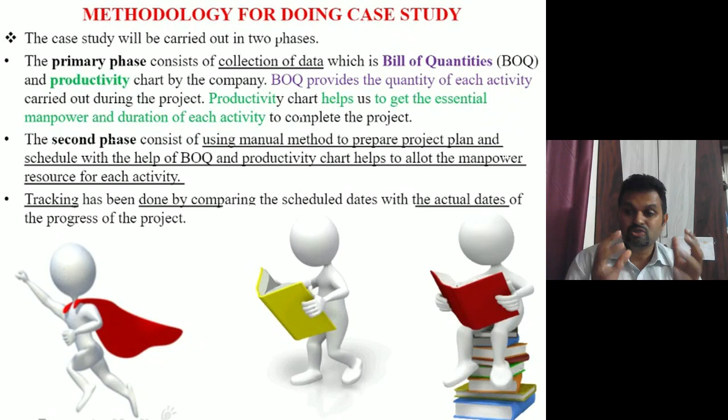We have extracted the scope of the work for this particular project. What I did, from the planning department of the project, I have taken the bill of quantity. So from the bill of quantity, I can take out what is the scope of work.

Next, the company has around 4 to 5 previous projects done in the same city, so they have a basic productivity chart. We are going to refer to the same productivity chart for our references for doing the planning. So we have taken the scope of work from their BOQ, and we have taken their productivity chart from their company's basic labor productivity chart. From there only we have taken the element.

In fact, now this is very very important, right? What is the issue we are having? Let's try to understand it. What is the concern or what is the issue we are having? What happened, I will tell you. When we are doing any kind of project planning...

When we are doing a project planning at an initial stage, we are not having all the details of the working drawing. We are not having all the working drawing details, right? But definitely we have some of the typical plans, working drawing, layout details maybe we are having. So on the basis of that, approximately I can calculate the quantity.

For example, if there is an 8 floor building and they have given me the layout plan, I know what the slab thickness will be, which is typical. I know in the layout where they have put the column, so I know how much the column is going to remain the same till the 8th floor. So I can calculate how much the quantity is, and I'm able to calculate all other quantities.

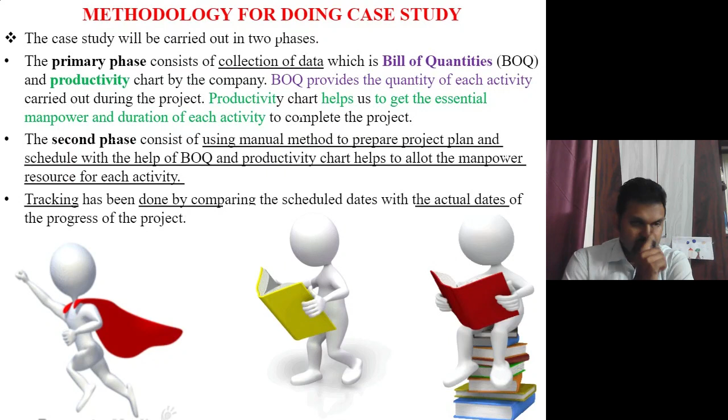My audio is not there. Are others able to hear my voice? Okay, audio is good. Javed, just do a refresh, I think there may be a small fluctuation. Okay, fine, thank you everyone.

Now, the issue which we face in the site planning is that all of the materials I can find out from the layout drawings or all the typical drawings. I can find it out, right? But the issue is facing in the steel quantity.

Sir, you may ask, what is the reason, what is the difficulty you are facing in the steel quantity? It is simple, sir. The reason is that even if they have given me the section or the reinforcement details in my plan section, for calculating the steel quantity, I need to go through the BBS, bar bending schedule. And for doing that bar bending schedule, I should be having all the reinforcement details of my structure, but which I'm not having right now at the initial stage. So that is one of the difficult phases we are having.

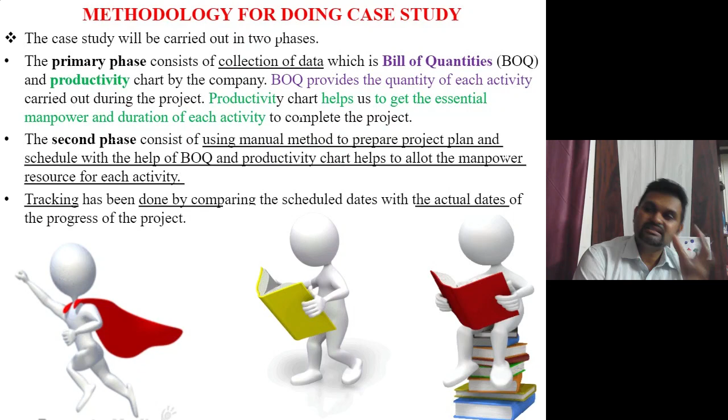So let's first learn how to do the steel quantity planning, which we are going to learn first in the preliminary stage. So what I did is I have taken a scope of work from the site directly, and put different elements around it.

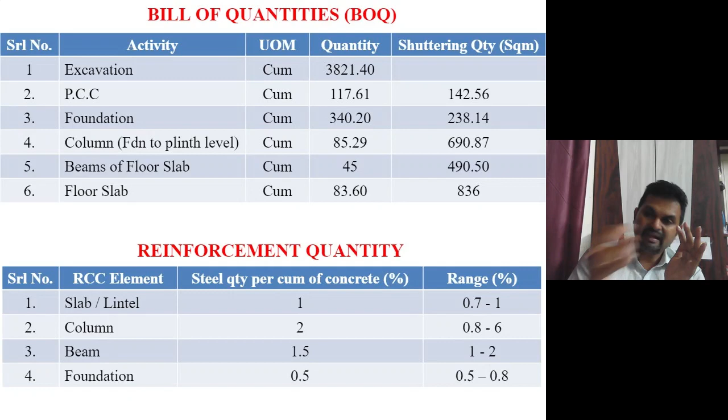When I solve some numerical problems, everyone should get the same answer. That's why I'm putting this third column, where I'm considering 2%. But it depends on your site condition.

You can take 0.8 if it's G plus 1 or G plus 2. If the structure is high, you can go for 3%, 4% — that depends. Next is the beam.

For the beam you can take anything between 1 to 2%, so right now I'm going to take 1.5%. For foundation, you can take somewhere around 0.5 to 0.8%, so here I'm considering 0.5%.

Now I have a question here, a very interesting question. Just a moment. What I'm experiencing here is... this is a very interesting observation, I'm telling you.

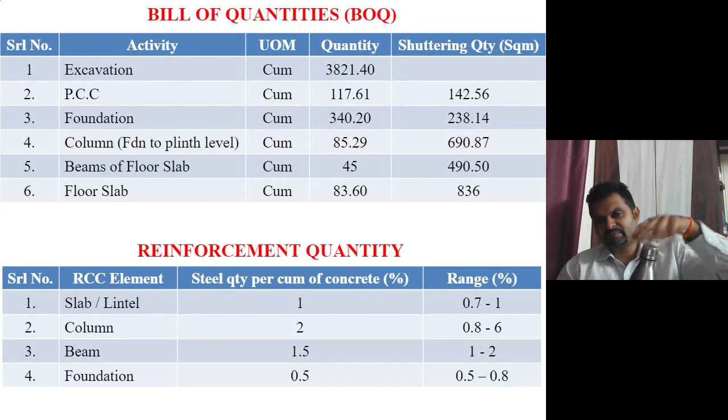Okay, okay, good enough, George. Okay, good enough.

Columns anchor the building, hence need the strength, and carry too much load. Probably it is the main structural member and will carry larger size rebars. Good enough, good enough. Because of the foundation in the ground and the number of supports.

Foundation in the ground and the number of supports. Okay, fine. Good enough.

Now we need to understand some basic things. What is the basic thing we need to understand? When I'm talking about any other structural member, like a slab or a lintel beam, the range is very less. When I'm talking about a column, the range is very, very high.

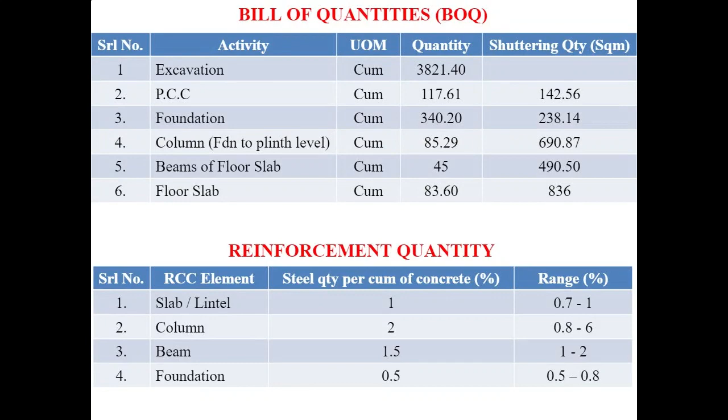The reason is we need to understand whenever the load is transferred from the top floor, let's take an example of a 15-story building. If I ask, the 14th story column is going to bear the load of that particular floor and even the floor above.

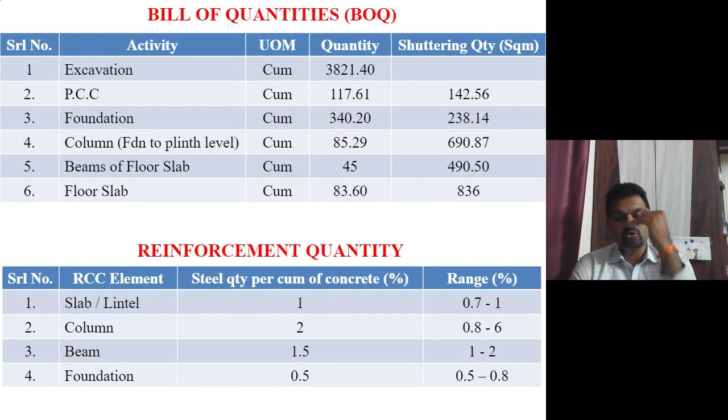As we move to the lower floors, for example the 13th floor, it carries its own floor load plus the 14th floor plus the 15th floor load. Similarly, every floor going downward takes the load of all the floors above it. In a multi-story building, the more floors there are, the more load on the column, which is not the case for any other structural member. That's why there's the most variation in the column.

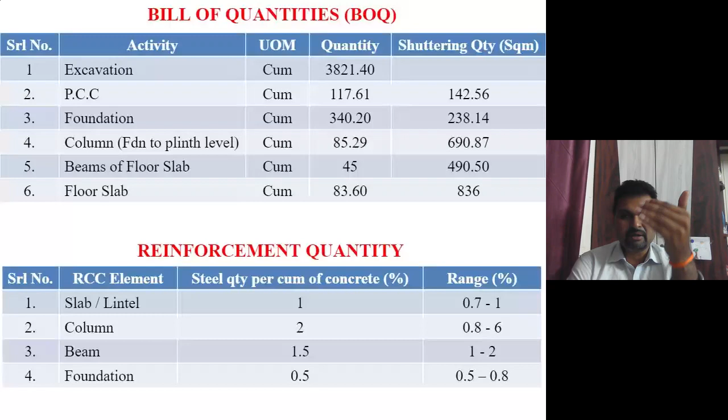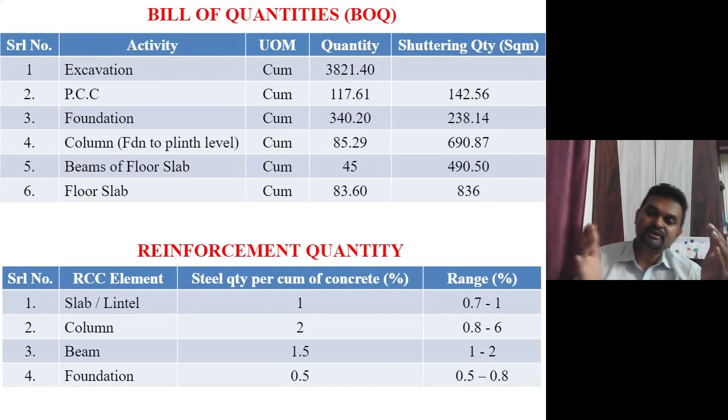If it's a bungalow or G plus 1 only, the steel can be around 0.8 to 0.9 percent. Once you go for a 4, 5, 6 story building, it can go to 2%, 2.5%, and so on. Getting the point? That's why the column has the maximum range in the steel percentage.

Okay, sorted out, concepts are clear. Now let's try to understand how to calculate it, so that this percentage will be clear.

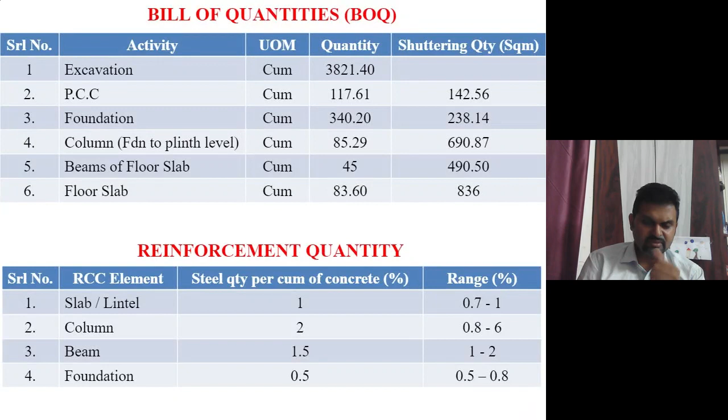But did anyone have any doubt on this particular slide? You may have some doubts, and I'm expecting some good questions so we can have more discussion. Does anyone have any doubt? If you don't have a doubt, you can say no. If you have a doubt, you can put it forward.

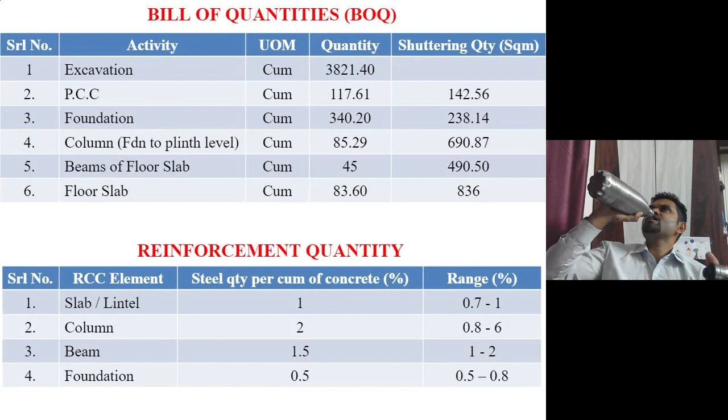Okay Sonny, do you have some doubt? No. Okay, fine.

Yes, that is because of the load carrying capacity. As the number of stories increases, there will be more load on the bottom columns, so they need to bear more load. That's why the steel quantity is increasing. Fantastic, good enough. I'm expecting some good questions.

So let's take the example of beams first, and how this range is defined. That is very important. Now the question will also be put this way: from where do you get this range? Basically you're asking this question, right?

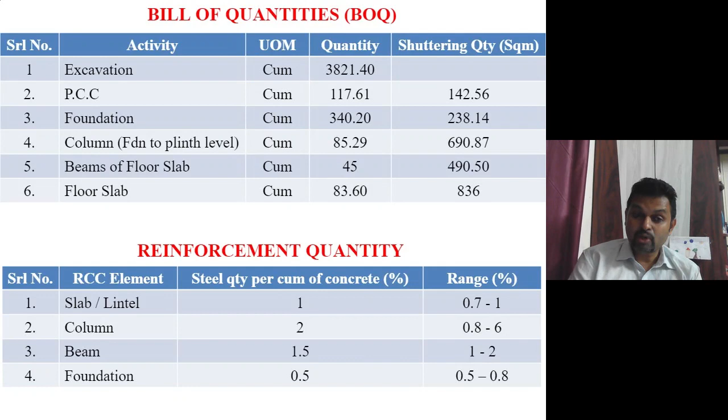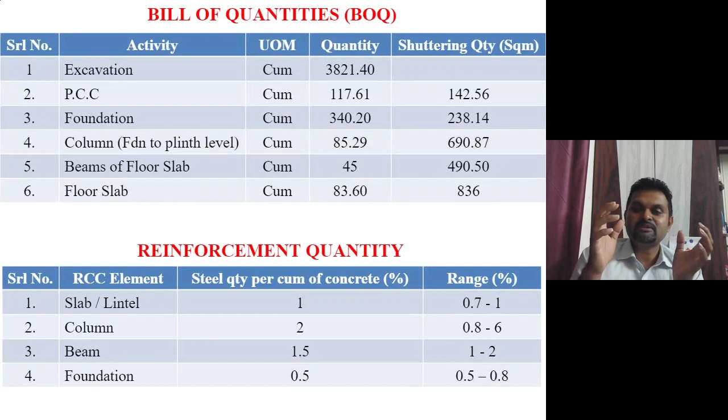We need to understand this range is as per the Indian Standard Code. The IS code doesn't say this exact range should be used, but for example, take the case of a column: the IS code says the minimum percentage of steel should be 0.8% and the maximum percentage of steel should be 6%. So what we understand is that the minimum and maximum percent of steel is the range of steel percentage in my column. From there we derive this particular range.

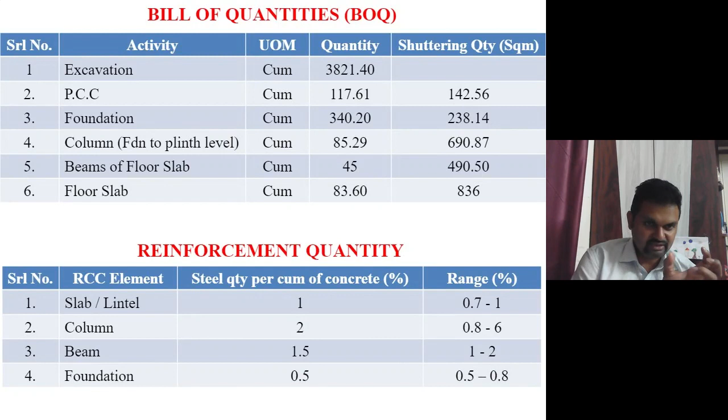Getting the point? Now the next question is, why is the range 0.8 to 6? You want to ask why it doesn't go below 0.8, and why the maximum limit is 6%. I think that's the question you want to ask, right? So now let's address it.

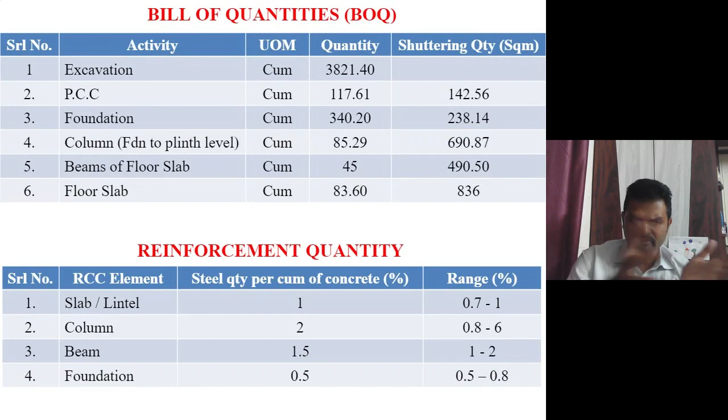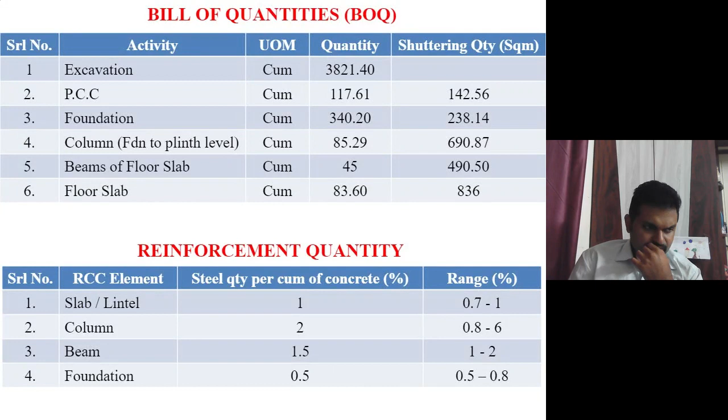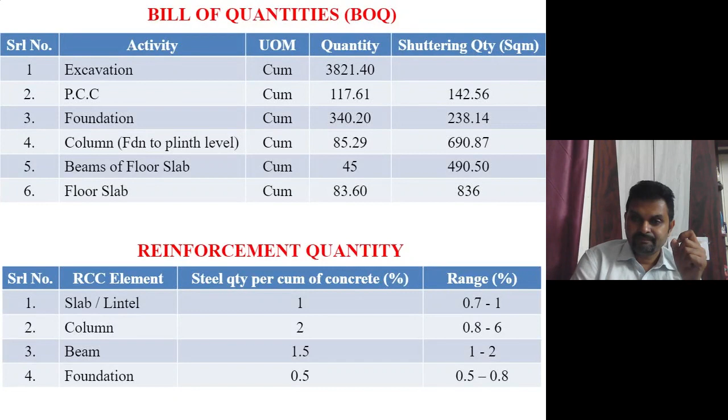I will give you an example with a slab, which will sort out all these questions so you can understand it similarly for the column. What happens when any standard code puts a minimum standard for anything? I'll tell you the case of a slab. If I refer to the IS code, it says the minimum slab depth will be 100 mm. Now there may be a question: sir, why 100 mm?